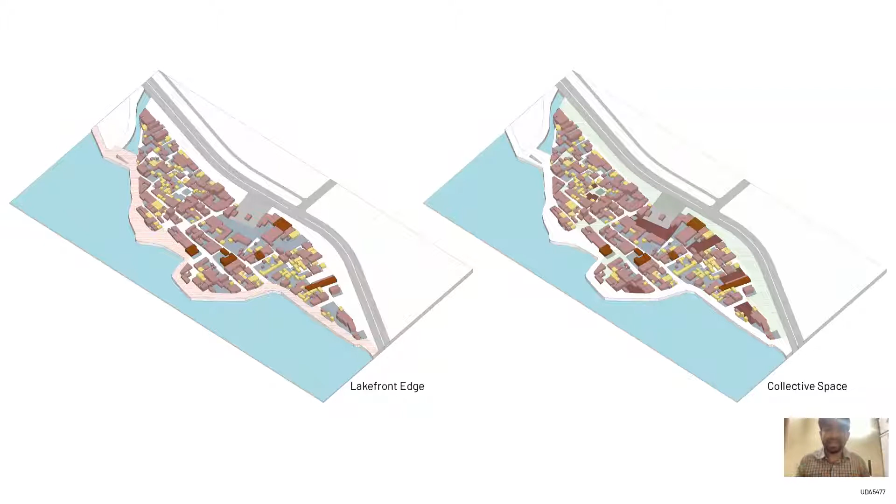Our general strategy is to have a conceptual plan moving forward by understanding three different entities: the lakefront itself, the courtyards, and the interconnected street network. Using these three networks with an interplay by a manifesto we've prepared for this project, we'll understand how the project moves ahead.

The manifesto for dynamic Indira Colony Basti makes for a broader framework through holistic integration of two important factors: social factors and environmental factors at a local scale. The manifesto seeks a bottom-up approach through community participation and design interventions through three distinguished categories: tactical urbanism, physical urbanism, and infrastructural urbanism.

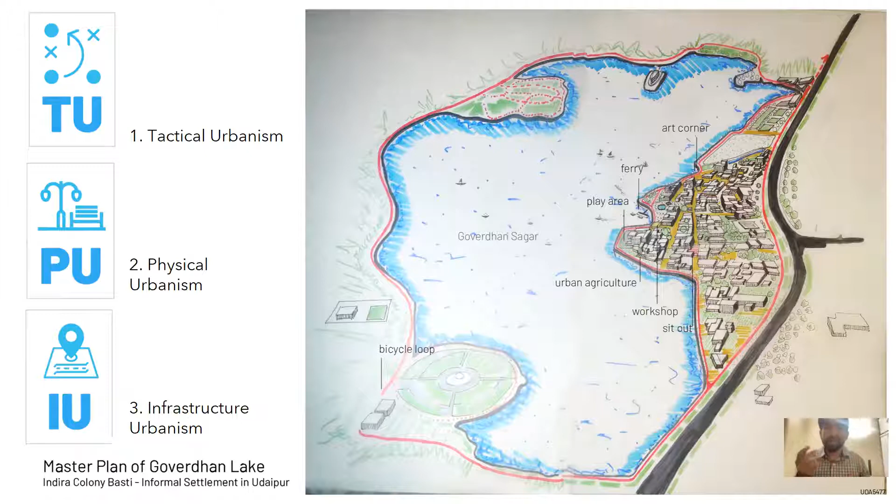Coming to the first category, tactical urbanism: short-term interventions such as climate-resistant furniture using recycled wood, wider footpaths, cycle transit routes along the Basti, artwork to uplift the beauty of the dilapidated facade of the place, and replanting new green infrastructure that are native and drought-proof species to Rajasthan.

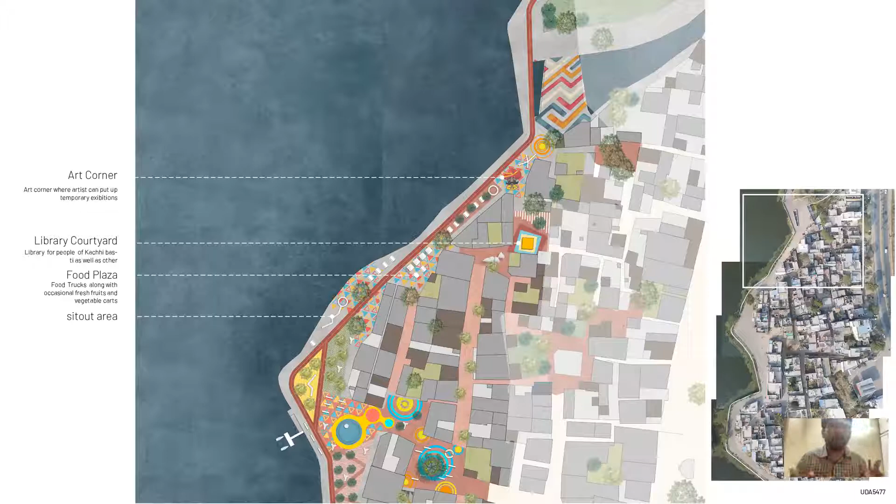Using such tactical tools individually and in combination, we can help reclaim the streets for non-motorized transport. This can help in adding an art district in the northern part of the site, transforming the monofunctional residential settlement into an eccentric street with increased pedestrian use and improved walkability amongst users.

The neighborhood presents an ideal situation for implementing safer pedestrian avenues and seeking non-motorized or car-free streets for its residents. Safe and walkable streets are desirable for any urban neighborhood. Walking and cycling could become the primary mode of transport within the area.

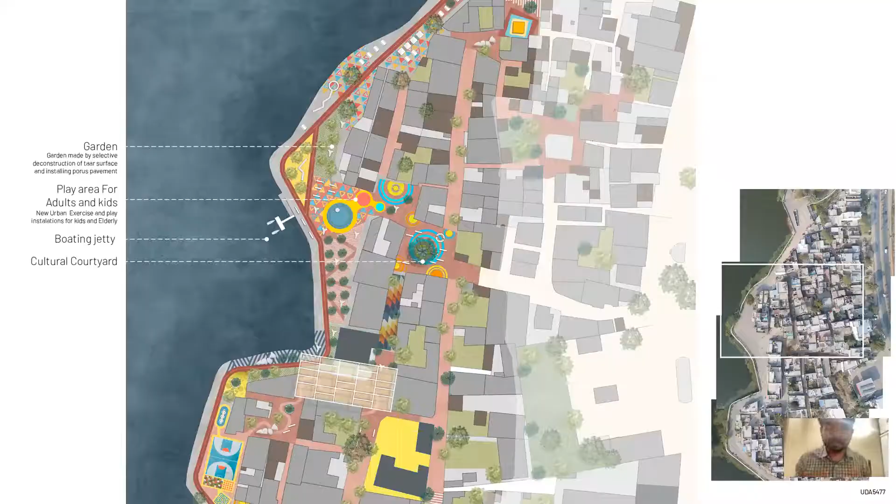Further street and lakefront beautification through interconnected streets can also help reinvigorate the social context in which current residents are living. Miniature paintings can be a supplementary feature.

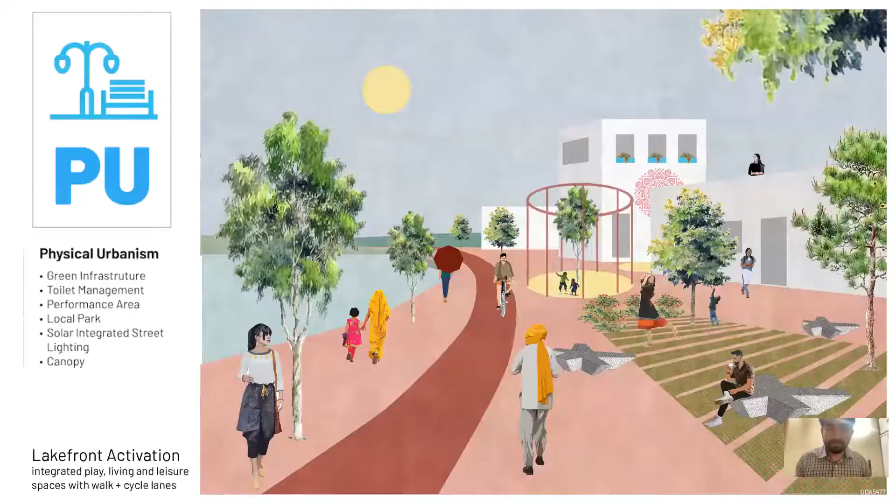The second factor is physical urbanism. This tool helps to socially reincorporate the courtyards for community interaction and helps productively use the lakefront areas. Having many crossings and signages for differently abled people will help make the streets safe.

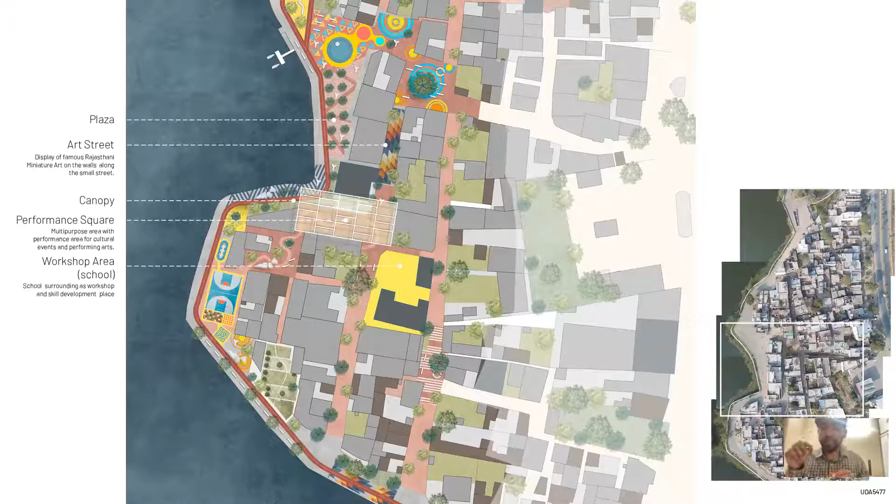It also strives for economic and sustainable engagement by creating a workshop area near the government school and community center, a mobile library for children, and a boat jetty on the northern side for seasonal tourists. The community center will make a socially active space for multi-purpose uses such as weddings, performances, and Republic Day celebrations.

Funding aspects are the most important thing. This is where infrastructural urbanism, the third part, comes in, where long-term strategy needs to be placed to create rainwater harvesting channels and bioswales for local organic waste management.

Road access can be cut off for vehicular movement on weekends, transforming the entire lakefront into a high activity zone for people and community. This lakefront edge will help establish small playgrounds for kids, seasonal market areas, and hangout places for residents, enhancing the quality of life and livelihood inside the neighborhood.

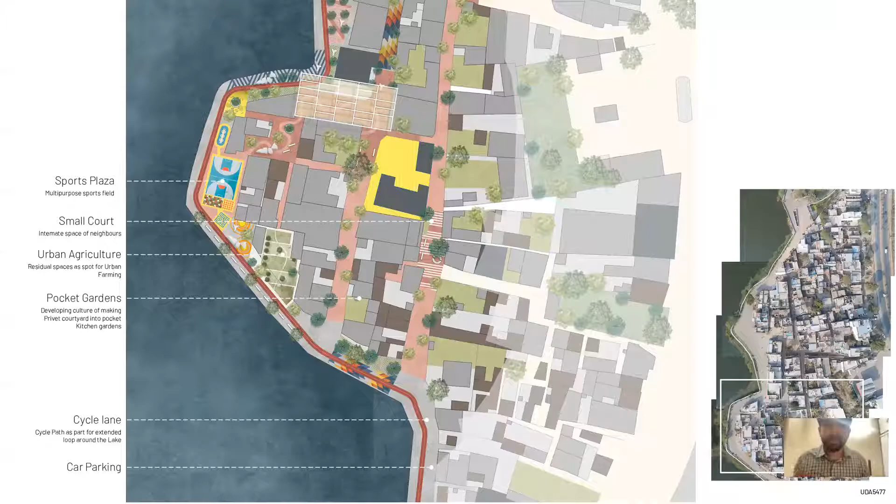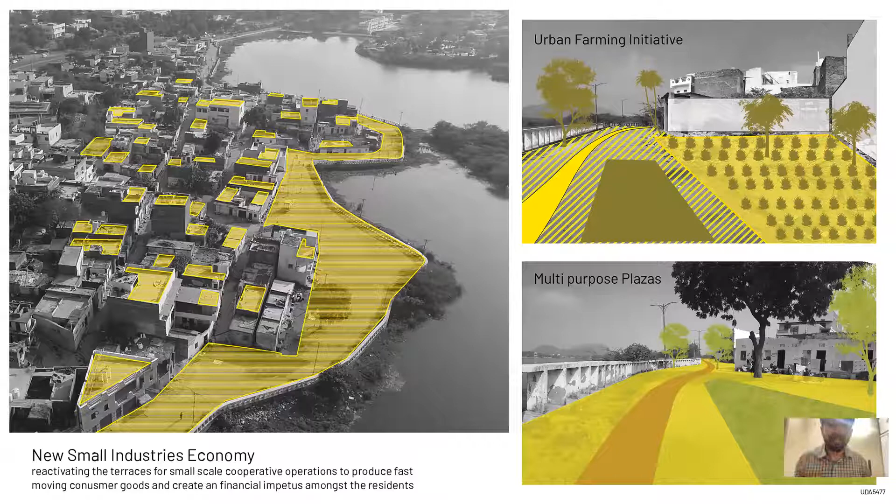We believe there is huge productive space, and that's where new urbanism can reconnect the Indira Colony Basti to the Goverdhan Sagar Lake to create a unified community asset, not just for the people but for the entire city of Udaipur, making a universal public space that is safe and accessible for all. Thank you.